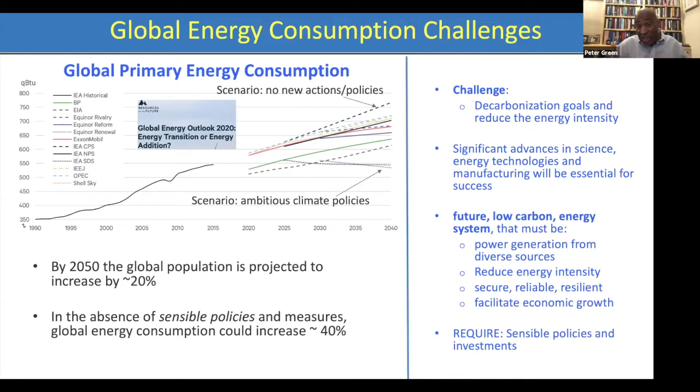I'm showing you a graph of global primary energy consumption as a function of time. What's interesting is that between 1990 and around 2015, energy use increases significantly, at twice the rate of population growth. Beyond 2020, there are a range of scenarios that various organizations, shown on the left, have been looking at, many of which turn out to be unrealistic.

For example, climate policies simply state what you need to be able to produce energy from, and what it looks like if you want to reduce energy use—those make a range of assumptions about technology and adoption. On the other extreme, if we do absolutely nothing, business as usual, we'll find that as the population grows globally by 20% by 2050, energy use will increase by about 40%.

That is seriously problematic. So essentially, the challenge is twofold: one, we want to decarbonize the economy and the energy system, and two, we need to reduce the energy intensity, the energy per capita. So there's huge technological and scientific advances, working together in manufacturing, that's going to have to happen.

And in the end, this future energy system is going to have to generate power from diverse sources, including fossil and non-fossil in the interim for the next few years. It's going to have to be secure, reliable, resilient. And yes, the economics are going to have to be right, because it's going to be a collaborative interaction between industry, academia, and government labs. And that all comes together, and it's going to be driven in part by sensible policies and investments.

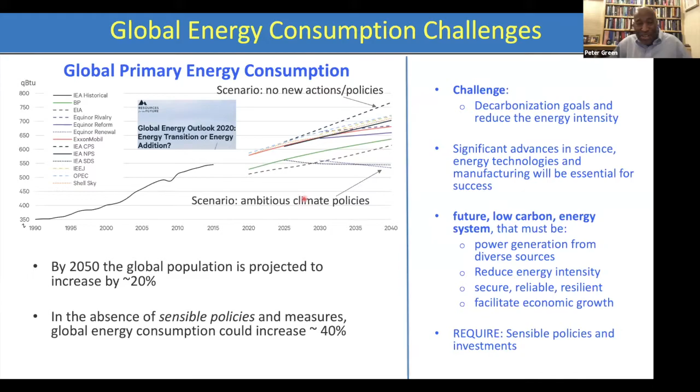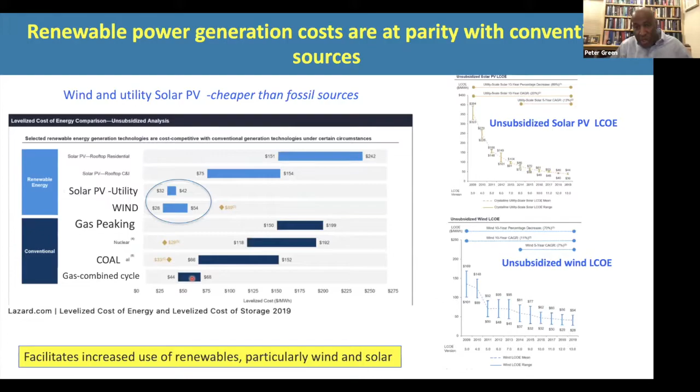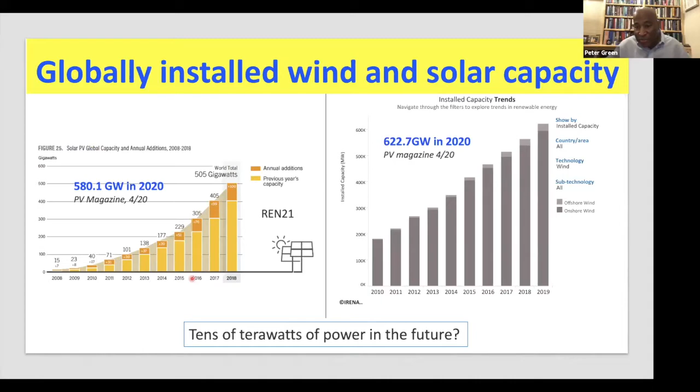But if you look recently, Wall Street Journal pointed out that Tesla is the 6th largest company in America. And there's a Chinese EV company that most of us never heard of called NIO, that is now the 4th largest automaker in terms of market capitalization. So you begin to see large corporations thinking about buying fleets of EVs. So the driving force is huge, is significant.

Another trend we're looking at is connected devices on the internet, from your smartphone across the board. These things all use energy. All the energy devices we talked about earlier are all there working independently. If you look at computing, data centers use a lot of power.

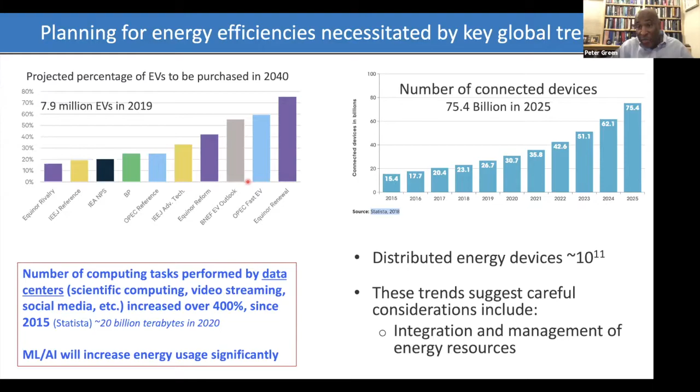Just the idea of scientific computing, video streaming, social media, what have you, that's gone up over 400% since 2015. And as we engage more in artificial intelligence and machine learning, we're going to be using a lot more computing power. So what we're seeing is that these connected devices and energy consuming devices working independently consume a lot of energy, they're not efficient. So we're going to have to think about how to integrate and manage these things. That too will contribute to significant economies of scale in terms of savings.

This gets us now to the question of electrification, because electrification is ultimately essentially where you want everything to be, right? Because EVs are incredibly efficient compared to internal combustion engine vehicles, by a factor of three, in round numbers.

The commercial sector and the residential sector are fairly electrified, but there's still a lot to be done. Space heating, in terms of electric space heaters, is far more efficient than the conventional ones, so there's a lot of room to be made. In terms of the industrial sector—chemicals, refining, mining—again, going towards electrification as part of the process and getting away from coal. And of course, transportation is where the most significant gains are supposed to be made.

Again, this was done in 2018. I think if this analysis is done tomorrow, given some of the new trends with new energy companies like NextEra, which has a market capitalization comparable to Exxon and in fact briefly surpassed it in October, things would look different. You look in Spain, Italy, and other places, Orsted, another European company, they're looking at investing over a couple hundred billion dollars in renewable energy.

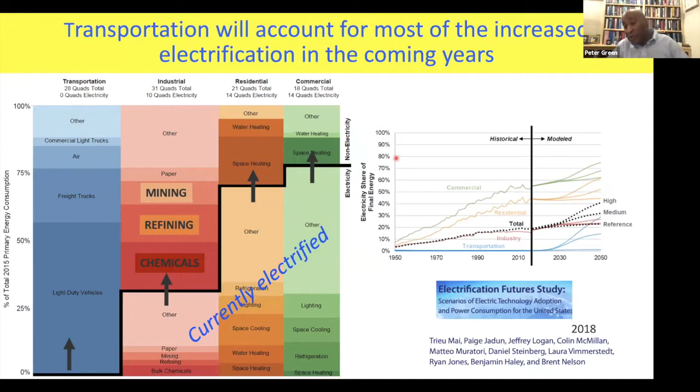So if I pause for a moment, I want to take time to articulate some challenges that weren't immediately obvious. In the first case, we're thinking about penetration of wind and solar into a grid, in some cases 60, 70, 80, 90%. What does that mean?

The old conventional grid generates power through synchronous generation. The new wind and solar power is connected to the grid by inverters, power electronics - very different processes. So the idea, we can get to this later on, is to figure out how to make this work in a compatible way. Right now the utilities do it well for 10, 15, 20%.

There are some other challenges going on as well. We're going to ask a lot more of power electronic devices than we ever had before, and materials that we ever had before.

This new grid system is going to have to monitor and control millions of devices that we discussed earlier. How does it happen for efficiencies? It's going to have to be secure, reliable, and resilient, and yes, cost effective, otherwise it won't work.

The buildings of the future are going to be grid interactive. Today they're primarily loads, but you're going to think of a building that not only provides its normal services of heating, cooling, and refrigeration, but also provides services for charging electric vehicles and a whole range of things. So essentially what you'd like now is a building that takes power from the grid, can give it back, and does it in a way that the grid doesn't become unstable. That's another major area.

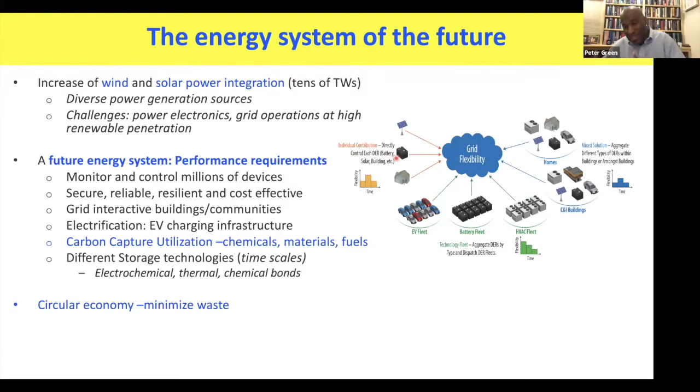So what I've done there is paint a picture for you in terms of what the challenge looks like, and try to articulate essentially where the efforts are going right now and how we think about them.

So in this next section, I'm just going to say a few words about NREL for those of you who are not familiar, to provide context for why we're tackling these problems. We began in 1977, actually the year I came to America, as the Solar Energy Research Institute. The work we've done in solar, I think many of you are quite familiar with.

One of the things, if you talk to NREL researchers, is, for example, the multi-junction solar cells used in space - those came from NREL. If you look at wind, the designs of the latest blades for wind turbines came from NREL working with industry.

There's a lot of work we're doing in the area of geothermal energy right now, looking at new advances. One thing I want to emphasize is that when the lab began, it not just did basic science, but it had to prove its viability and worth. So it began connecting to industry from those years, because failure to find additional funding meant the lab was going to be shut down. It was a real issue - they had layoffs one after another. It was 1991 that George Bush, Senior Bush, made NREL a National Lab.

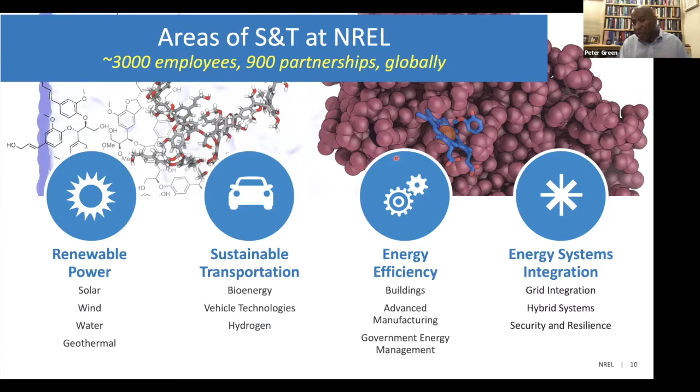We publish as a lab something on the order of about 1,400 papers annually. Some of them are reports, technical reports that get downloaded - our reports get downloaded by thousands every day. And there are about 600 archival scientific papers published yearly, again all with university partners. We never tackle a problem by ourselves - it's always with partners, and more often than not, industry, because of the way DOE, where EERE organizes things.

So the big question then is, what does our 10-year vision look like? Because as a lab, we had to think really carefully about what is our value proposition in the decades to come. What difference are we going to make? And it's something we're worried about seriously over the last 4 years, given the current climate. EERE management gave us the opportunity to simply do this as we thought about how we make this difference.

This essentially captures where we're going. At the top, you see this integrated energy pathways. And integrated energy pathways gives you a sense of how do we make plans for what the grid of the future might look like? Given the kinds of work we've done over the years, it's clear that we're thinking about this system of the future that's going to provide multiple services to customers, not just energy, but also energy for buildings, manufacturing, synthesis, and what have you, and cybersecurity, a range of things.

Electrons and molecules is an interesting one - it's like power to X. Basically, you're taking something cheap and of little value like CO2 or water and converting it using a range of processes to higher value items, chemicals, materials. And then the other areas of the circular economy.

Remember, I pointed out that you're going to have to increase the capacity of wind and solar by at least an order of magnitude in the years to come. And so if you're going to do wind, you have to think about how do you produce wind blades in a way that they can be recyclable, so they don't end up going to a landfill. Solar and the solar modules and a range of things we think about this - perovskites, how do you discard of things, how do you design things?

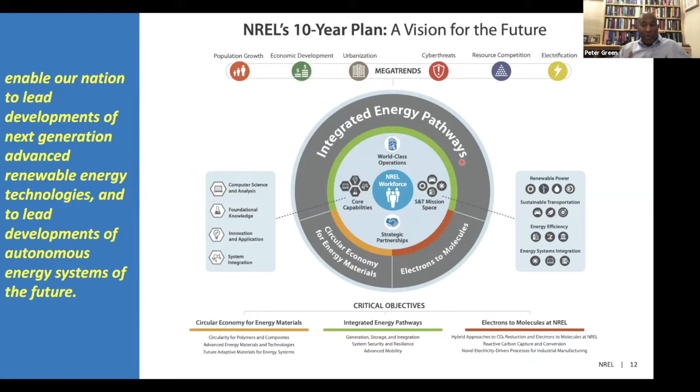So the bottom line is, how do you design things in such a way that in the end, you don't end up in landfill, but there's further use for them - something like you guys are thinking about a lot. So these problems, a lot of places are thinking about at one level. But the value proposition is that we can be a convening force in some areas where we're already ahead, then we can work collaboratively. So, let's begin with the first one, integrated energy pathways.

So this idea is just the power generation, transmission, and distribution in the future system I mentioned earlier. Just to get us all on the same page, the current power system - Edison's power system, or the Edison-Tesla system - really is large synchronous generation from a central point where you're providing power and simply dispatching it in one direction only. It goes to the customer and is used, and that's it. You're sort of balancing supply and demand, and that's it.

This future system now, and we can see glimpses of what it has to look like. You're seeing solar arrays, geothermal plants, electric vehicles, storage, wind farms, a range of things happening right now. As you get to this level, you're going to have a lot more wind and solar. These are variable resources, and they're also power electronics based in terms of the connections. So we're looking at some applications of power electronics that we've never done before, conditions that the current material systems don't do well.

There's more work to be done. Lots of communications and control to understand what's going on, optimization and control theory, lots being done. As I mentioned, distributed energy storage devices, interdependencies—you have different manufacturers producing technologies that have never really worked together. They're not really interoperable. How do you do that?

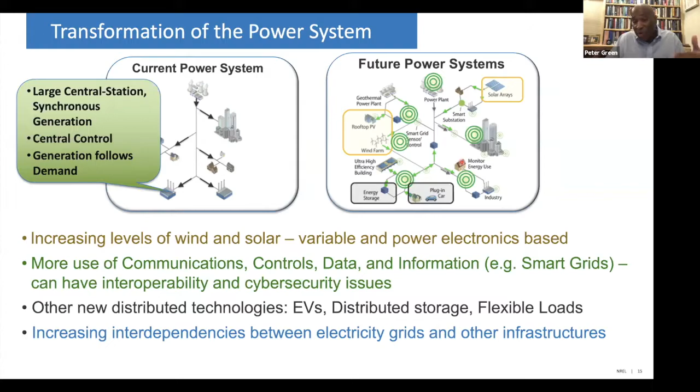So you're looking at a highly complex system that in the end won't be managed by humans anymore. It's not possible. So we're thinking about autonomous systems, machine learning, artificial intelligence. That's the picture, and I'll give you a sense as to where we are soon on this matter.

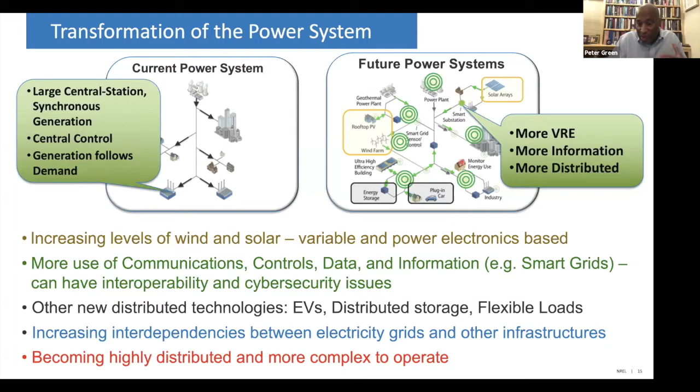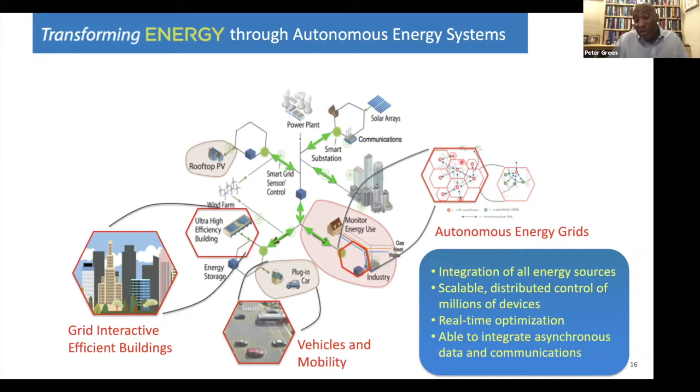Vehicles and mobility—this whole notion of autonomous vehicles and controlling when they charge, when they don't charge. This is very interesting. You're looking at weather patterns, what's happening in the environment, to determine whether or not you're going to charge the vehicles to conserve energy. And then of course the advanced wind plants, I'll talk about that soon.

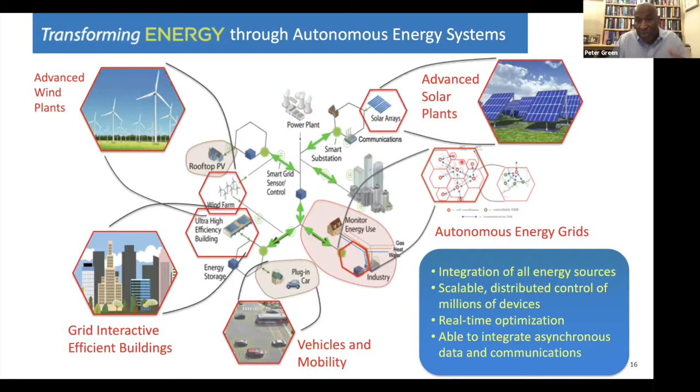Big questions here to be done, new challenges, and the solar farms, very similar things. This slide talks about a case where you have a series of energy assets that are programmable in terms of attachments to them. The idea, the algorithm development, is to optimize the performance of these energy devices within a given environment. If they're connected, you can optimize them as a whole, and optimizing their performance in a given environment means you're actually able to reduce the energy use. This kind of work's been done.

In fact, we won our R&D 100 Special Recognition Award a few weeks ago for this kind of work. At NREL, we're hiring a different cross-section of people—people doing a lot more algorithm development. We're actually writing papers in mathematics journals now that had never happened before. That gives you a sense of how the changes are coming around.

Getting a little closer now, saying more about this autonomous grid. The idea is that you think about a small area, and this small area has all the energy resources as well as smart devices that are all interconnected, and they can share energy. You might think of a small community with a series of homes, each home has battery storage, rooftop solar, and a range of other devices like EVs connected. All these homes are connected in a community.

In fact, there's a community in Colorado called Basalt Vista where NREL has done that, working with the utility, Holy Cross. You can charge your car using PV from somebody else's home, but that community itself is set up in an autonomous way where everything is connected. It's also connected to the grid, but if the grid goes down, this community can operate quite readily over some period of time, or in the midst of a disaster.

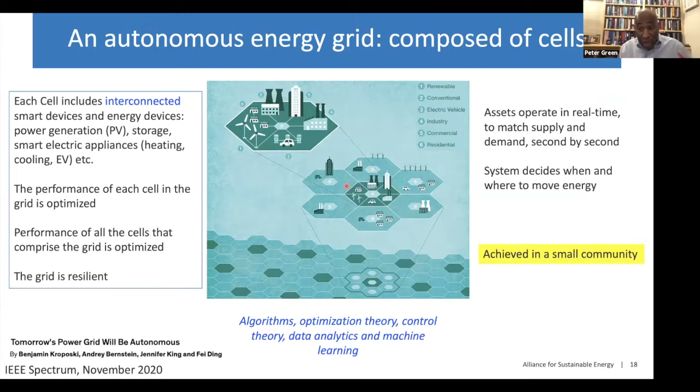And the investments, if you look at, for example, NREL has a lot of collaborators. There are about 60 staff members of NREL working in this area. Many of them are new, meaning the last 4 to 5 years. We have collaborators from Caltech, Michigan, ETH Zurich, and other places. This is an example of a project we're doing that will continue in the years to come.

Now, this part with demonstrating in a small community, and then thinking about how do you do this at scale where you have millions and millions of devices. We've actually started an entirely new program called Advanced Research for Integrated Energy Systems, ARIES. This is basically where we're trying to demonstrate in a very practical way how this is going to happen.

ARIES is a research platform designed to understand the operation of the future energy system. As a reminder, this system is going to have a lot of energy assets that vary in physical size, large numbers of them, and we have to work with interoperability of all of these systems. So we're looking at energy storage, power electronics.

There are a lot of big groups in power electronics, hybrid energy systems, namely could be a combination of wind and storage, as one example, or using wind energy to produce hydrogen. These are all things that we're looking at right now.

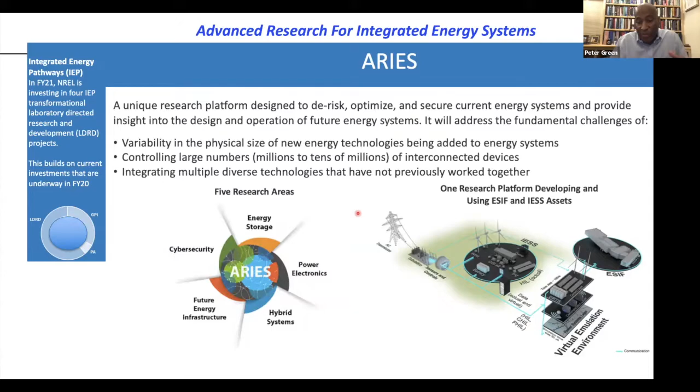At NREL, I want to bring two things to your attention. There is what's known as the Energy Systems Integration Facility. ESIF, as it's often known, really is designed to examine and evaluate new energy-related technologies, like inverters, for example. A utility develops a new inverter before they put it out there to simply wreak havoc with customers' electricity. You can put it in ARIES, in this artificial environment, to test it out and see how it performs and collect a lot of data on it, as one example.

So it's a place that operates with smaller devices, sort of less than the range of 2 megawatts or so. It's connected to another campus, known as the Flatirons campus. That campus has megawatt power wind, megawatt solar, megawatt battery storage, all these things, where we can actually put together a grid system and run a lot of experiments.

We can do, for example, black start experiments, so we can introduce faults in the system to understand how they respond. This entire massive grid system, the 10, 20 megawatts, is isolated from the regular grid outside of NREL through an agreement with our utility company, where all of these things can be done.

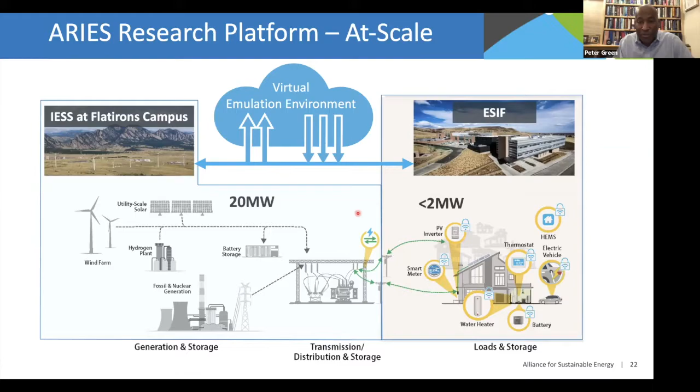And we're going to use a combination of that as well as simulations to understand how millions of devices operate. So that's essentially what integrated energy pathways looks like.

The second area that I mentioned earlier is called electrons to molecules. The idea is basically you're going to use cheap renewable power, wind and solar likely, to drive reactions, converting CO2 or water into higher value things like chemicals, fuels, or materials. That's the whole idea. Another thing to look at is hydrogen, electrolysis, and how you reduce the cost, the price of hydrogen to use. Hydrogen has a whole range of uses, producing ammonia across the board to processing, to obviously hydrogen-powered vehicles.

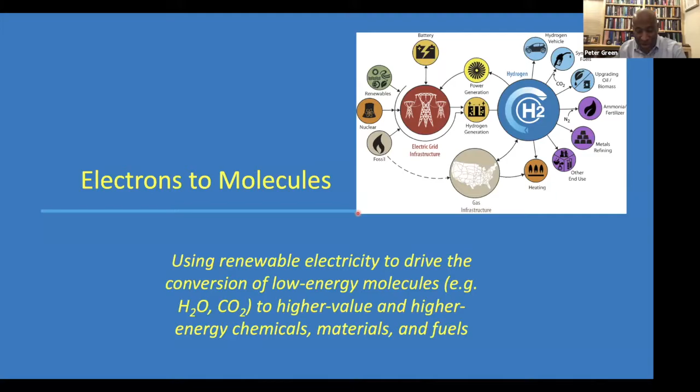You guys are in Southern California, so there are a lot more hydrogen-powered vehicles in Southern California than anywhere else across the US, for that matter. And so with this, the whole idea is it's not just producing hydrogen, but also producing, as I mentioned, other fuels and chemicals.

The idea is that we're working with a lot of companies, from Exxon to Shell to a range of others, where we're looking at certain kinds of processes. Can we scale them? And why us? Well, we've been doing this for quite some time. It's a big value proposition for the last 30 or 40 years, for that matter, in terms of scale up.

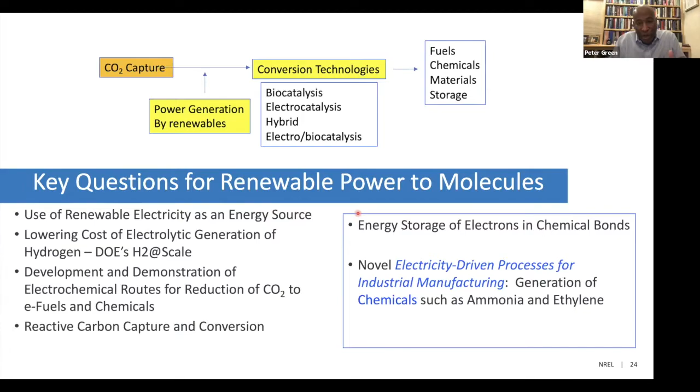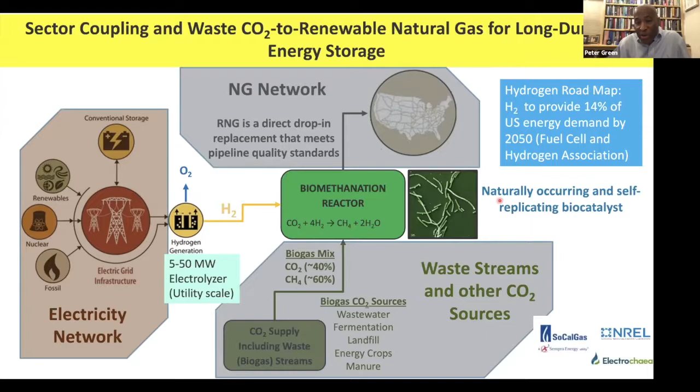Here's something we're doing recently: using an electrolyzer to produce hydrogen, and using CO2 from a range of sources in a biomethanation reactor to produce synthetic CH4. Why? Because Southern California Gas, who we're actually working with on this, has a huge network for natural gas that powers all kinds of things across the entire US. That network can also simply be used to carry hydrogen. There's a lot of work going on in that area. So apart from the chemicals, there's also the storage capacity.

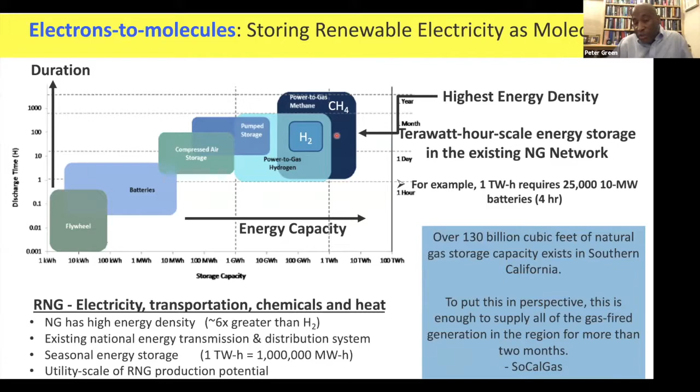If you look at this graph showing discharge time versus capacity, flywheels on a grid operate at a really short time, a matter of seconds, batteries for hours. Over here is this idea of producing a gas for seasonal storage. You often see the term power-to-gas or even hydrogen. This is something of interest, just one example, but there are lots of examples out there, some of which I can't really talk about.

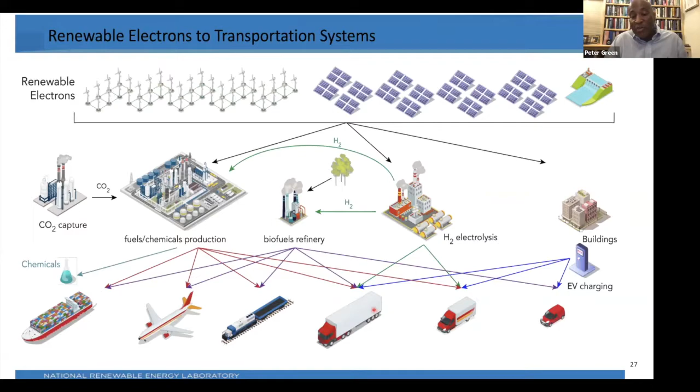Chemicals for marine applications, airlines—there's a lot of work. There's a lot of excitement now about using ammonia fuel cells for powering marine purposes. Over here, electric vehicles. Hydrogen, people think, will power line-haul vehicles. That's the application—this is going to be the key thing because of the power density compared to batteries.

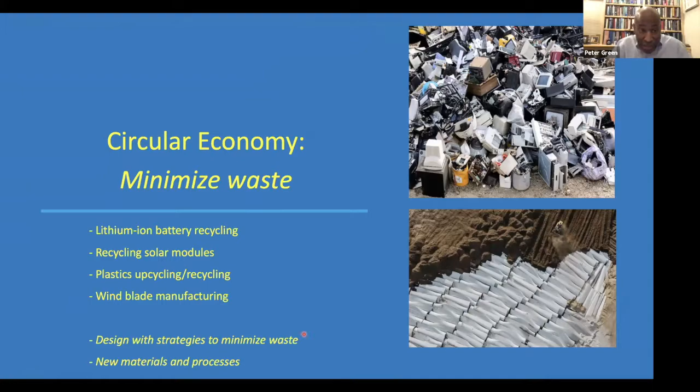So that's electrons and molecules. This next part I want to talk about is really on the circular economy. The idea is recycling, and I'm just going to pick a couple of examples.

One is the wind blades. In the next few years there are going to be millions of metric tons of wind blades in landfills, and you can't do that. These blades are made from thermosetting polymers. The idea now is to use thermoplastics, some thermoplastic composites. Here's an example of an 18-foot thermoplastic composite-based blade that you can simply recycle when it's no longer in use. All the tests are showing things are really good. There's a company in Europe that's gone up to maybe 40 meters by and large. So there's a lot of possibilities here.

The weight limitations—the other big thing about these wind machines is that the blades right now are huge. If you've ever seen them trying to transport a blade across a highway, you know what the problem is. Using new manufacturing processes that NREL developed with GE, Siemens, and a number of partners, you can actually do on-site manufacturing of blades. That's the plan long-term.

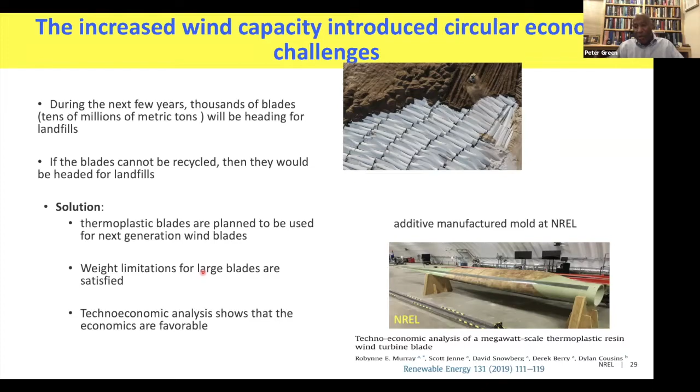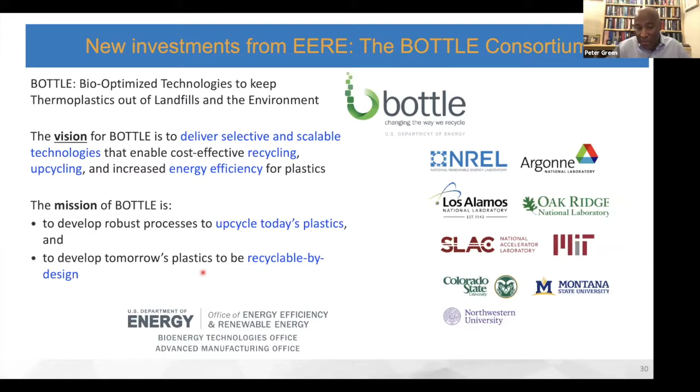The other area is looking at plastics waste in bottles. The idea is this new consortium known as BOTTLE—bio-optimized technologies to keep thermoplastics out of landfills and the environment. It's funded by DOE, led by NREL. The mission is to look at processes to upcycle plastics and to develop plastics that can be recyclable by design. To the right you see examples of some of our partners.

For the chemists here, in many cases we can figure out how to depolymerize a number of plastics—not many, some cheaper than others. But BOTTLE is going to look at ways to deconstruct or depolymerize, and then try to repolymerize, maybe using bio-based monomers, to make new materials. This is a real excitement right now.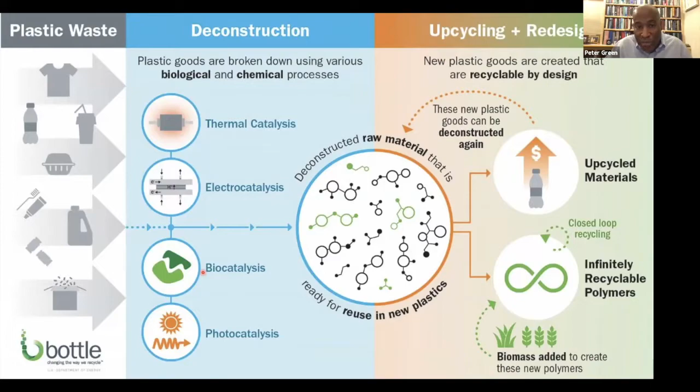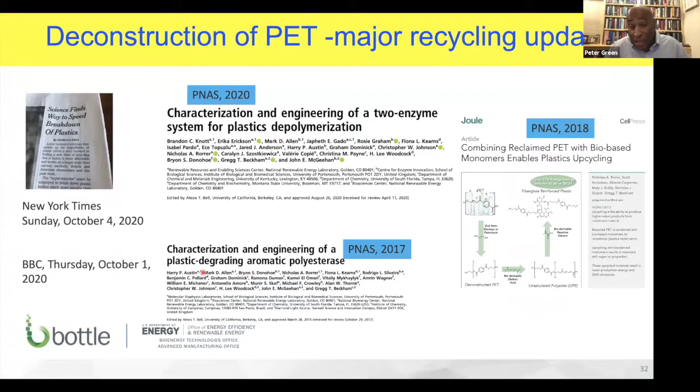There are two EFRCs out there on this, and we're connected with them. Two examples in papers in PNAS that hit the popular press involve the depolymerization of polyethylene terephthalate and simply upcycling it. So there's a lot going on here, again NREL together with collaborators. Here are the partners again—just some of them, with others coming on board.

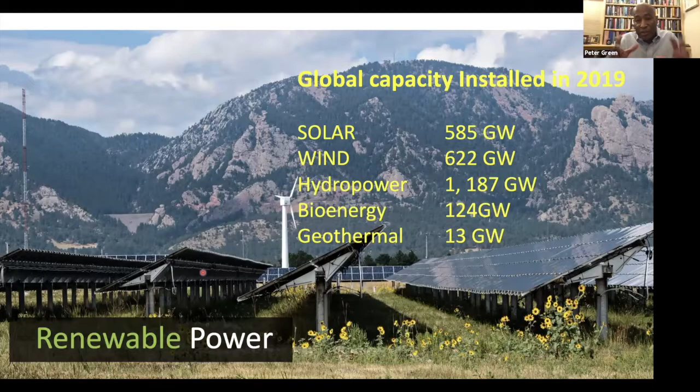So I get to the last part of the presentation, the question of renewable power and wind. The new challenge is wind: you have less than a terawatt of wind, and you want to get to tens of terawatts. How do you do this? How is this going to work? A group of wind researchers from across the entire globe spent close to a week, a number of days, at NREL, asking really important questions about how to articulate the grand challenges and how they lead toward enabling this to happen.

They're basically divided into three areas, and this work is published in Science. First, wind farms tend not to perform optimally. One of the simplest ways to see this: if you look at this picture of the wind machines—I never say windmills, wind machines are wind turbines—behind this one, for example, there's a wake, so there's low energy wind coming here.

That really reduces the amount of power produced by this machine compared to where it could be somewhere else. The other challenge is that not all the wind machines are oriented in the same direction when the wind's passing through—they're never optimally done that. So you have to figure out how to control them autonomously.

Trying to understand the wind resource and the interactions are still big questions people try to come to grips with. Forecasting is still a challenge.

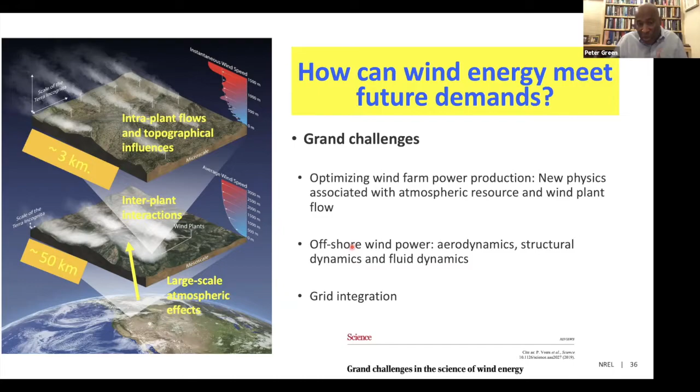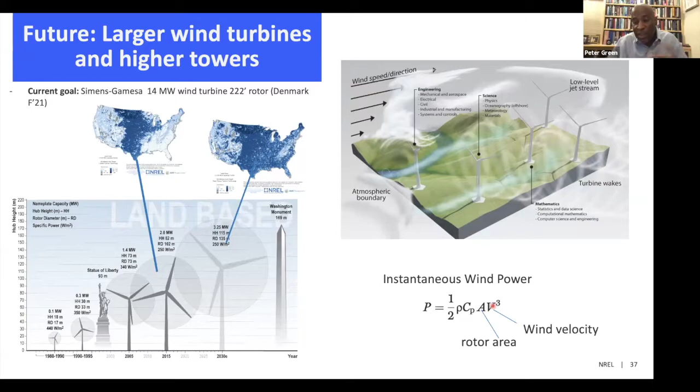Solar, which is near and dear to many of your hearts, we're going to have to go up by a factor of 10. As prices drop, you start seeing solar installations go up significantly—this is globally, and over in the US it's gone up a lot over the years.

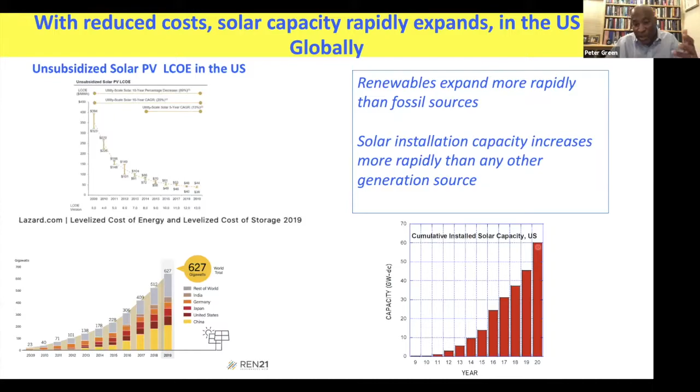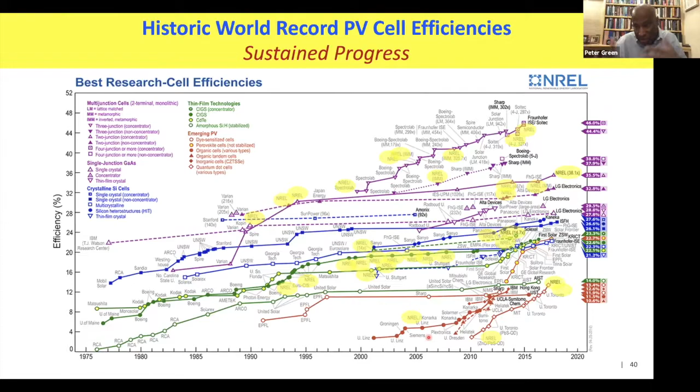This is just, to me, truly remarkable. This is a solar chart, and many of you have seen this. The point is that each line represents a different technology, and the fact that the charts are always pointing up means we're continuing to improve in efficiencies—these are good things. There's still room coming up.

Silicon, of course, corners the market—that's the primary technology out there. They're not the most efficient, as you guys know. The III-V multi-junction solar cells tend to be far more efficient—46%, now 47.1%, is a record in the lab.

The whole idea is that we can't use these multi-junction solar cells beyond space and military applications because they're too expensive to make. I don't want to go through the long discussion, but the bottom line is we're working on ways, using this so-called dynamic hydride vapor phase epitaxy, to produce these things much more cheaply and rapidly. We're not there yet, but if we could do that, it opens new possibilities.

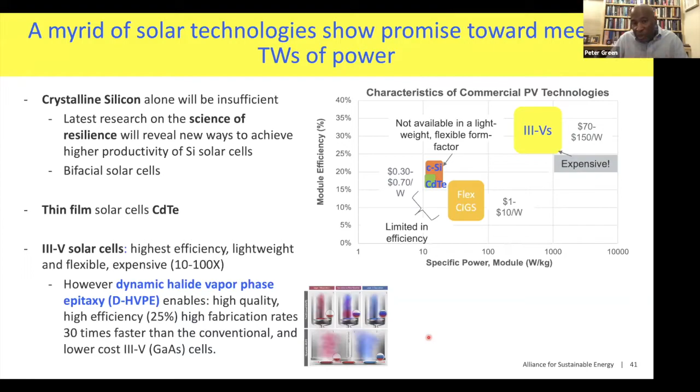The thin film solar cells are great too—cadmium telluride, just one example, and CIGS. These are also making key contributions. So this is just the multi-junction solar cells reaching 46%, now 47.1% in the lab.

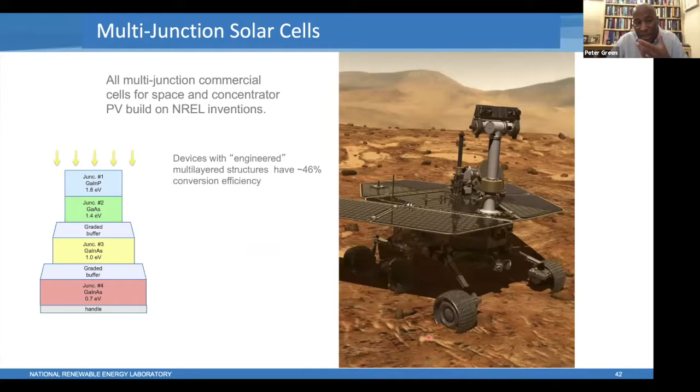On the perovskites—showing enormous promise because you can actually produce them like newspaper, in principle. There are lots of applications coming to light now, looking for example at multi-junction perovskites and wide bandgap perovskites, showing significant promise, with a quite compelling cost as well.

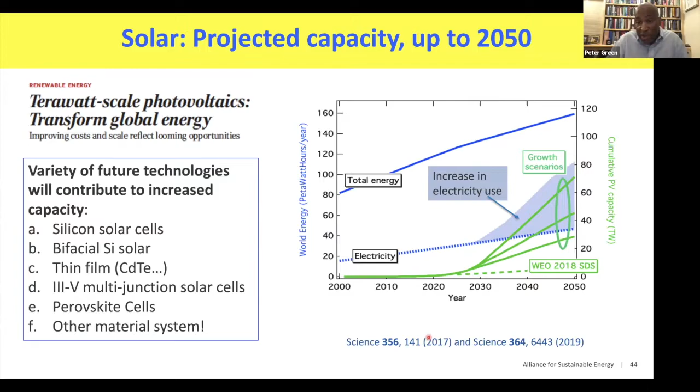So there are lots of possibilities for solar to get to the 10s of terawatts. I'm showing you right here a Science paper—again, all the best people around the world got together, Harry Atwater and a number of you were part of this paper—showing essentially that if you electrify everything, in principle, through not a very simple process, you get true energy efficiencies requiring a lot less primary energy use, with solar potentially contributing through a range of technologies, provided the economics are right—and that group seems to believe it.

So I'm near the end right now, and I wanted to circle back and talk about electrification. If you look within the last few days, just look at the Wall Street Journal for companies like Iberdrola, Enel, Orsted, NextEra. If I did the math right, there are a couple hundred billion dollars in investments that are going to be made in wind and solar over the next 5 to 10 years, which is incredible. And these companies have market capitalizations that look like oil companies, essentially. Again, it's the Wall Street Journal pointing this out. So that looks really good.

We're going to have to do the electrification properly. We're going to have to figure out how to optimize the performance of energy devices. And as I showed you, there's a lot of work being done, a lot of progress being made if they're connected. The other issue is most of the energy that you convert from coal and from natural gas to electrification, most of it's lost. So that's another advantage of going to renewables, by the way.

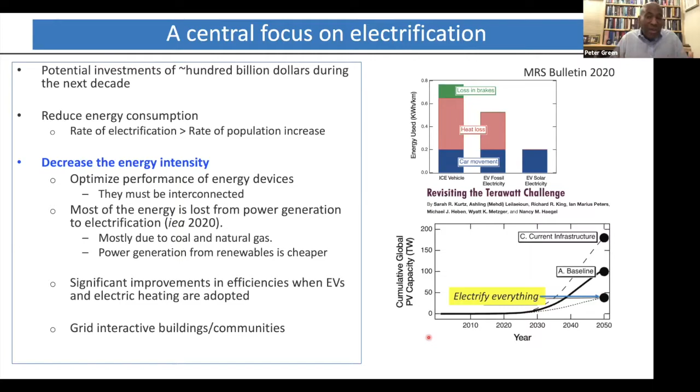And the efficiencies of EVs are significantly better than internal combustion engines. And the EVs, as you guys who own them know, upkeep is a lot cheaper, fewer moving parts. And as you start looking at grid interactive buildings and grid interactive communities, as you're able to design these things right, where you have devices you can control at scale, that's going to make an incredible difference as well.

So in the end, my point is that this transition is an inevitable transition as we go from fossil power towards renewables. Nuclear is going to play a big role. There's a lot of work being done, for example, on small modular nuclear plants. You can also look at carbon capture, utilization, and conversion to fuels and materials and storage. So the fossil community or the natural gas community will play a role there. The new innovations in technologies have to occur to do this.

I should mention there's a lot of work at NREL on modeling, looking in terms of pathways. There are lots of very different pathways to get to a point where we reach a low carbon future. And so there's a lot of very sophisticated modeling being done to understand how that might work. So I think in the end we'll do better, but if we accomplish this thing and accomplish it rapidly, it's going to depend largely on really sound policies. And two, we have to make sure the economics is right. Otherwise, our fellow citizens of the globe are just going to take the chances.